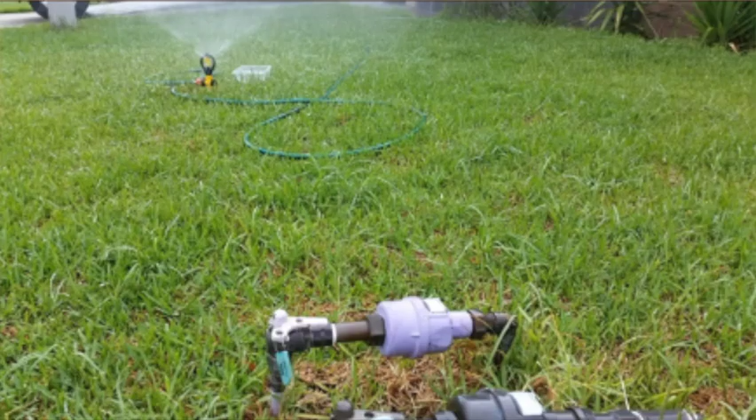Now, the risk of fire spread in urban areas can be prepared for by retaining moisture in the green spaces, which was just covered in parts by various people's comments and Dr. Allen's presentation. You can see here, this is a recycled water meter and a drinking water meter, and someone's liberally irrigating their lawn.

Under fire conditions, it's often towards the end of a drought or in drought, where rainwater tanks are often empty. There's typically water restrictions applying to the drinking water supply. That might mean intermittent, occasional hand watering for houses, but sometimes councils aren't even allowed to irrigate their open space, which limits the ability to keep the green space green.

Now, for the Blue Mountains, this is potentially worse because the upper Blue Mountains water supply is reliant on just those little catchments up at Blackheath and Medlow Bath.

Now, I'm not saying that it's not a relatively secure supply. It's just that as you go into climatic variability, it doesn't have the multiple sources that the main Sydney metropolitan supply has. That became apparent in the 2005-2007 drought period, where there wasn't a huge amount of water left.

So that's a possibility that I know the Blue Mountains Council are cognizant of. Fortunately, at that time, you didn't have the 2019 fire conditions occurring at the same time as that low level of water supply.

Now, firefighting water. Okay, so you've got the preparation, now you've got the firefighting water. You need the water while the fire is happening. That can be obtained by the drinking water supply.

But under duress of emergency, water restrictions are probably going to be thrown out the window. People are just going to get whatever water they can. You're going to have people opening every hydrant trying to fill some lake at Blackheath, but Mark solved that problem.

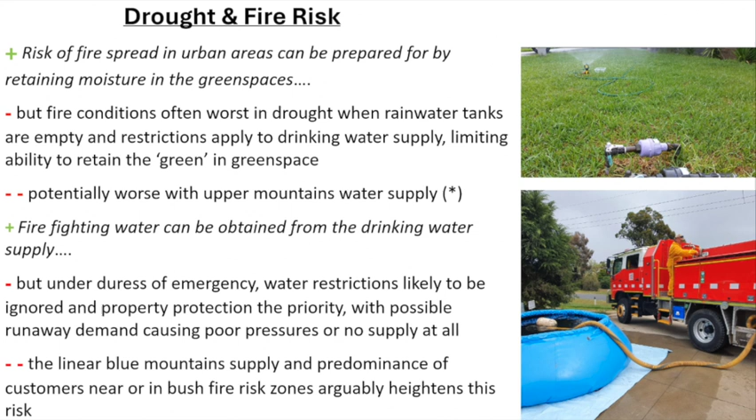Yes, so you've got this issue of can you rely on this water supply? Now, the Blue Mountains water supply is linear. It's not like typical water systems where you can rezone areas if there's a lack of water, bring in water from other reservoirs, opening valves and that.

It's a linear supply. There's really only one pathway for water, and the stakes are really high with this system. Multiple breakdown points, lack of power, not being able to transfer water from one reservoir to the next.

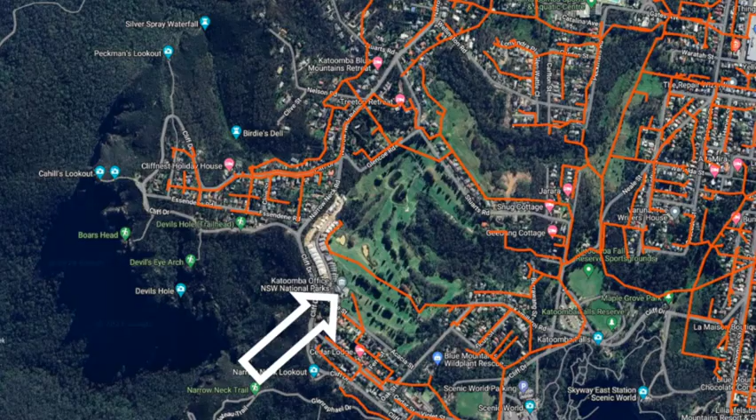Well, we've got wastewater flowing underneath the ground all over the place in the Blue Mountains all the time, even during a drought and even during bushfire conditions, well, at least up until when people are running away down the mountain and they've already prepared their house. So we'll get back to that later, and here we are.

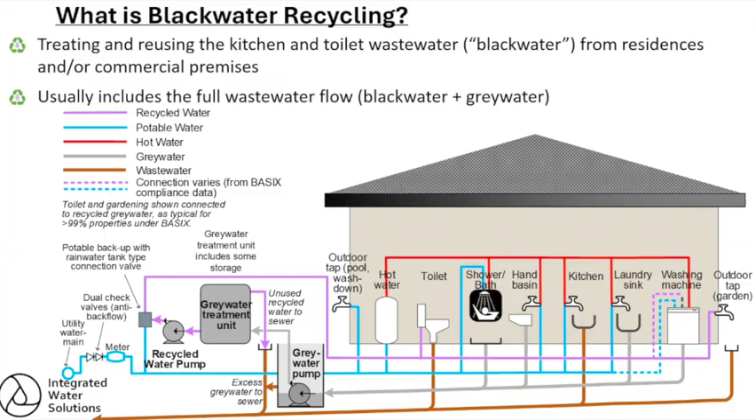Full wastewater flow, black water and grey water. Now, when people say wastewater is like 99 point something or other % water, it is true. I'd say grey water is more like 99.99% or more. Black water, you're talking about 99.75%. But that 0.25% is a real pain to get rid of, because it's got stuff in there that requires multiple processes to remove for the water to be useful for high value purposes such as toilet flushing or garden watering.

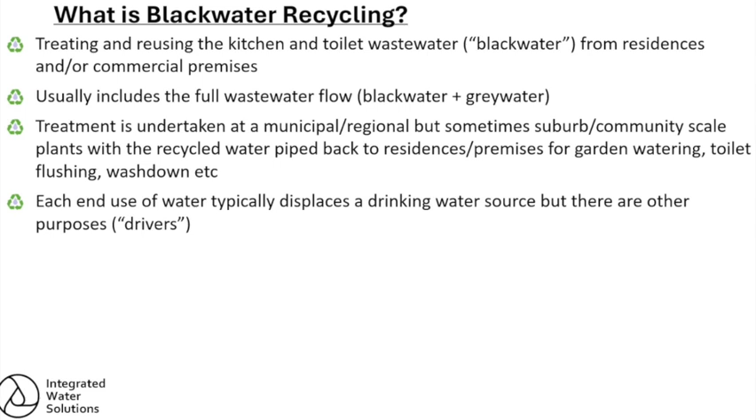Treatment for recycling black water has typically been done at a municipal regional scale, and we'll get onto the reasons why in a sec, but there has been some smaller scale stuff which I'll also touch on, which is my area of interest, and it's where there could be more of a future. Plants with the recycled water usually have it piped back to residences and premises for garden watering, toilet flushing, wash down, and of course, as I mentioned, laundry use.

And as of 2015, certainly in Sydney Water's recycled water areas, the water can be used for veggie patches. Each end use is typically displacing a drinking water source, but there are other drivers, and that's what I'm going to get onto in a moment. So there's different things in that 0.25% of wastewater which we're going to get rid of. The main one's the food, like the food scraps and lots of the stuff, and our human waste.

That food has got energy in it, and we basically rely on settling and biological methods to get rid of that. So letting the wastewater settle, sludge settles out, but there's still all the dirty water above, and we rely on bacteria to remove that, typically by aeration methods. Now there's nutrients in there, especially phosphorus and nitrogen, they're the main nutrients. Phosphorus can be removed by biological methods, but chemical precipitation is usually what's used for phosphorus. And then nitrogen, there's no choice but biology. We have to use a combination of bacteria to do that in a bit of a complicated process.

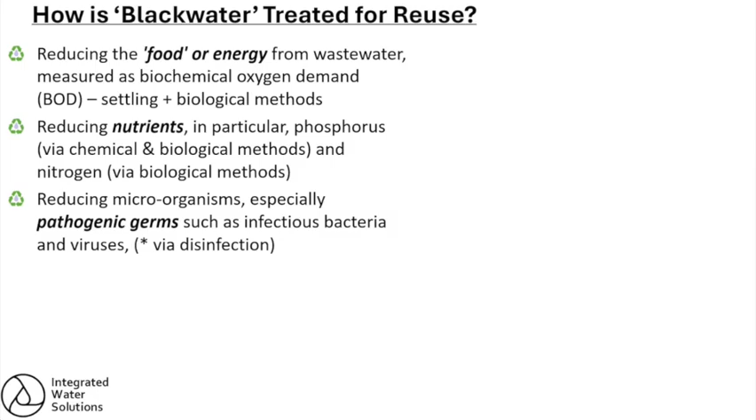With all of this, in the process of trying to remove the food and the particulates from the wastewater, addressing the nutrients, that helps reduce the amount of pathogens in the wastewater. But once you've cleaned it up largely so it looks like drinking water, it looks clear, you still need to disinfect it. So there are human health and environmental risks associated with each use of recycled water. If you're just irrigating a golf course at night, for example, no one's around, maybe you don't need to treat it to the same level as effluent which is treated for garden watering, where there's aerosols and people could be breathing it in.

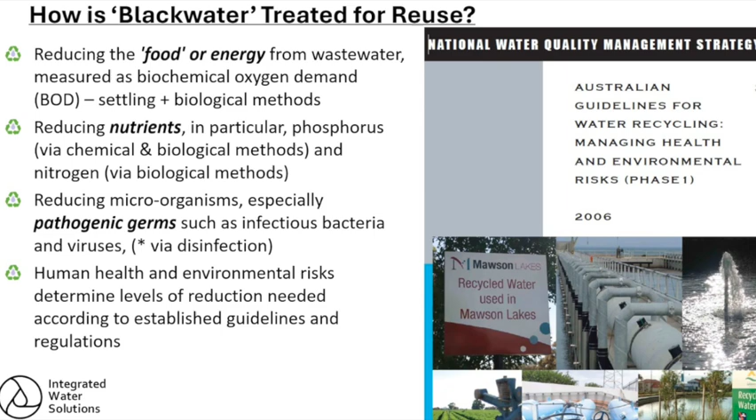So a range of professionals working together at a national level came up with these guidelines in 2006, which have been rolled out as regulations across the states in various forms to give us very good guidance on how to deal with this. It's comprehensive, gives a lot of guidance and a lot of flexibility for particular end uses. Even though it's quite old, it's still very current as far as its applicability.

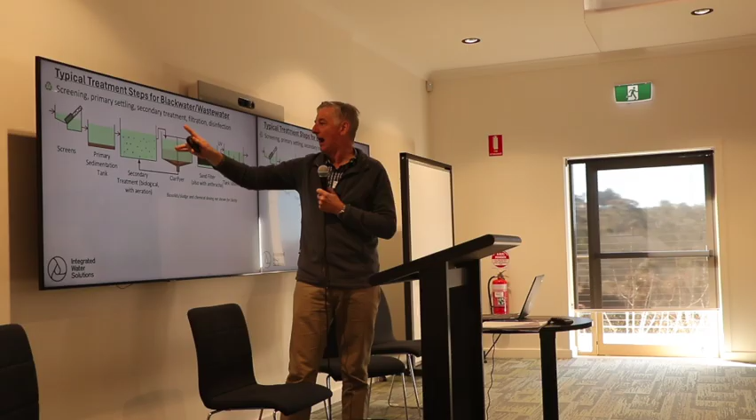People put all sorts of things down the sewer, and that's just reality. Kids put stuff down. So it has to be screened first to remove the gross solids, and then you've got this wastewater that is usually settled out, and then the sludge is taken away to digestion or some other disposal method, and then it needs that secondary aeration to break down that food and start to also eat up the nutrients. These two steps can sometimes be combined, there's whole different permutations and combinations of that. And then that process, when it's bubbling away, looks like a chocolate milkshake, except it's not crunchy.

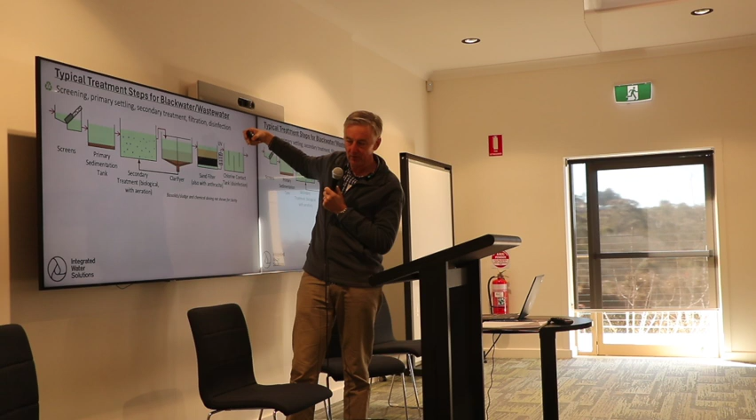So then it's put into a clarifier, and the activated sludge, basically the bacteria and other microorganisms, typically settle out, and then that's put through the sludge processes, and then you've got this clear water, which usually needs to be filtered. Sometimes we're chemically dosing for phosphorus along the way, and then it needs to be disinfected for the higher grades of recycling, such as toilet flushing and garden watering. UV, chlorine contact tank, and off you go.

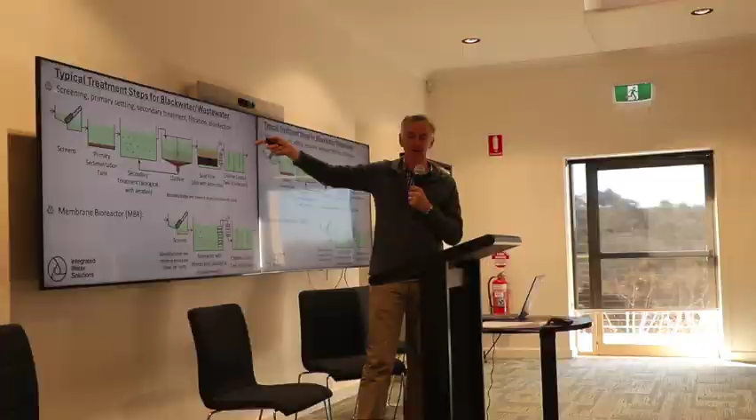This process here is something that's been the main go-to during the 20th century. It was developed in the early 20th century. Many of you would have probably seen the old trickling filters, those big tubs of rocks with the Hills hoist sort of thing rotating around, trickling.

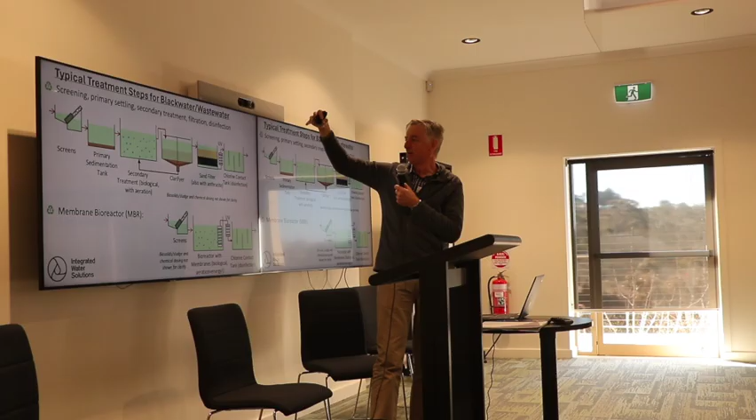That was the earlier attached growth trickling filter method that was developed back in the late 1800s, early 1900s. But this process here, with modern aeration, air blower pumps to pump air in, and pumps and equipment, scraping equipment, we're able to adopt this approach to comprehensively treating wastewater basically all around the world.

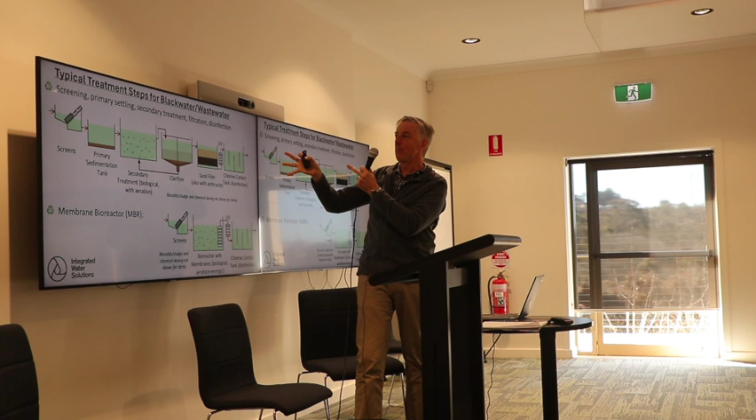But in the last 20, 30 years, newer technologies have enabled a more compact version of this, and you'll hear talk in the small-scale recycled water space of small, medium-scale membrane bioreactors. What you have here is screening, and then basically all these processes happen in this one unit, and the wastewater is then sucked through membranes, and then you've got this clear effluent.

So you've got rid of the food, you've got rid of a lot of the nutrients, and you've got rid of nearly all of the pathogens. Some still may get through, not so much the bacteria, the small viruses. You've got to disinfect those. This has been a really good innovation in making high-grade recycled water possible and affordable at a smaller scale, but it still has its issues.

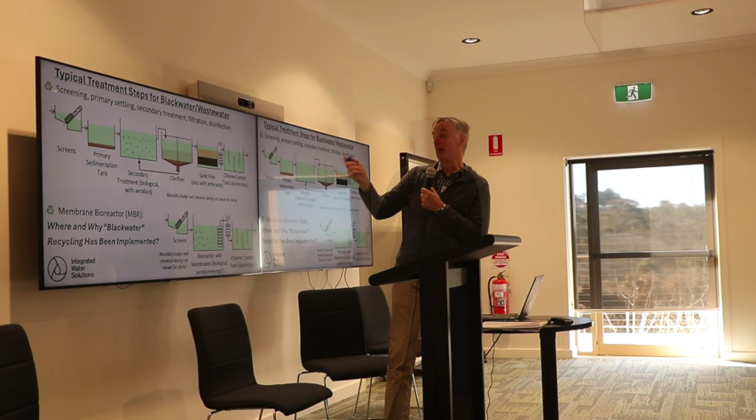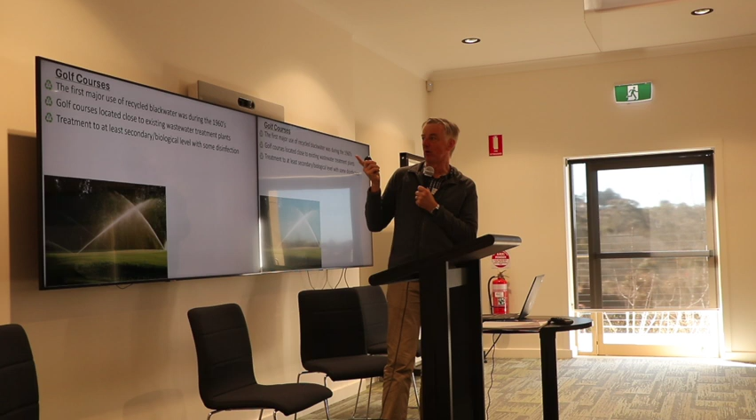So where and why has blackwater recycling been implemented? Okay. First one, golf courses. First major use was back in the 1960s. This is my understanding, certainly the case in New South Wales. You had golf courses located close to existing wastewater treatment plants. The treatment was to at least a secondary biological level, so without going through an actual filter process, with a sufficient bit of disinfection.

And why? The driver? I'm not a golfer, no pun intended. Affordable irrigation water for golf clubs. Now the water utilities were often providing the pipe to connect the plants on a cost recovery basis because they got something out of it. They could put less effluent into the waterways. I think during the 60s, the environmental consciousness was starting to really kick in. 1967 for Sydney, you had these particular golf courses.

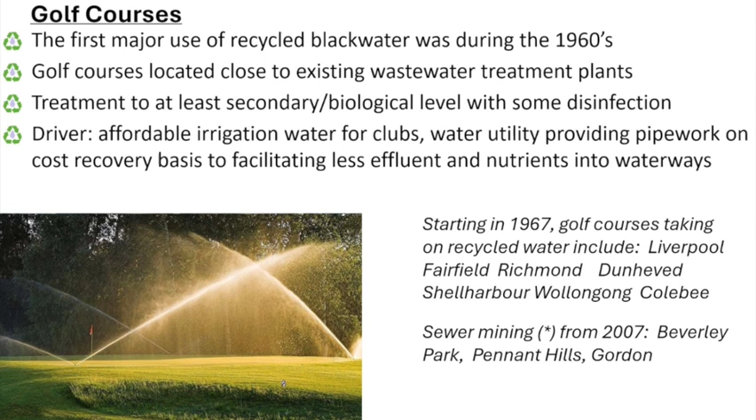Now, another thing that's come on board, I'll introduce this term sewer mining because it relates to the Blue Mountains potential for recycled water. That's where you divert wastewater from the sewer and recycle it for an end use. And because you've taken the wastewater from the sewer and you might treat it to get the recycled water for your particular purpose, you've got the sludge and the solids and that sort of stuff.

You don't have to put it in a digester and process it and then truck it away somewhere like major plants need to have done. It can just be dumped back in the sewer and then that gets handled in the sewer system at the treatment plant.

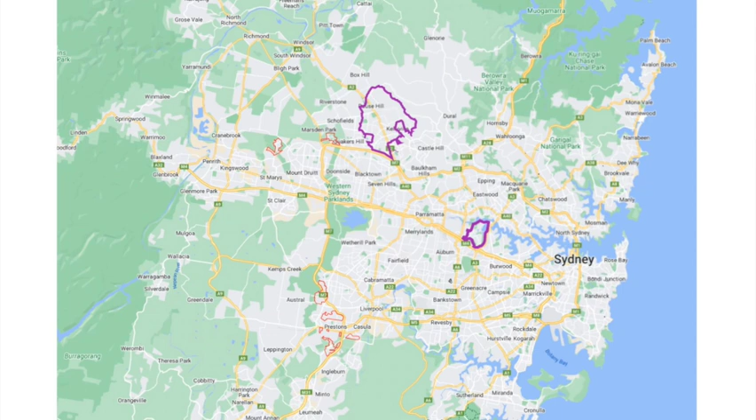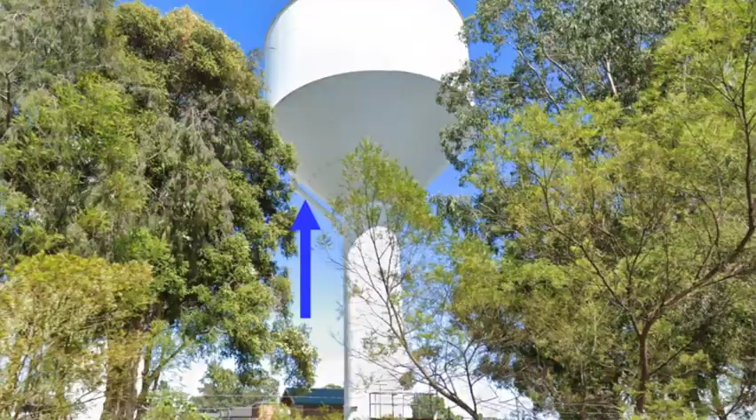And then you've got the chlorine contact tank, the serpentine route, where the chlorine is allowed time to kill off the bugs. In this plant, they built some wetlands to discharge the effluent. This is the water reservoir that the effluent is pumped back up into.

This is at Kellyville, so this is at the southern edge of the catchment, and the water is then reticulated into a second set of pipes. It's called dual reticulation. A couple of other names you'll see in a moment. Now I've got an arrow here. See this pipe here? External pipe that goes all the way out to the top of the reservoir and comes in from the top. What happens at Rouse Hill is that this recycled water is being fed back to the subdivision.

It's about 33,000 houses. It turns out that during really hot weather, they use more recycled water than the wastewater they produce, substantially more. So it has to be topped up from the potable system. It's the sort of thing you wish you didn't have to do, but it happens here, and there's reasons why. I'll just go through here.

Major development in the early 90s. Wastewater from new residential and commercial areas is treated at the new recycling plant, reticulated back by this third pipe, dual reticulation, non-potable network. Lilac is the colour for recycled water pipes. Many of you would know that. It's used for garden watering, toilet flushing, and later on in 2006, 2007, it was permitted to be used for laundry after testing, and then now veggie patches. The excess flows to a tributary of the Cattai Creek. It's the Cattai Creek catchment.

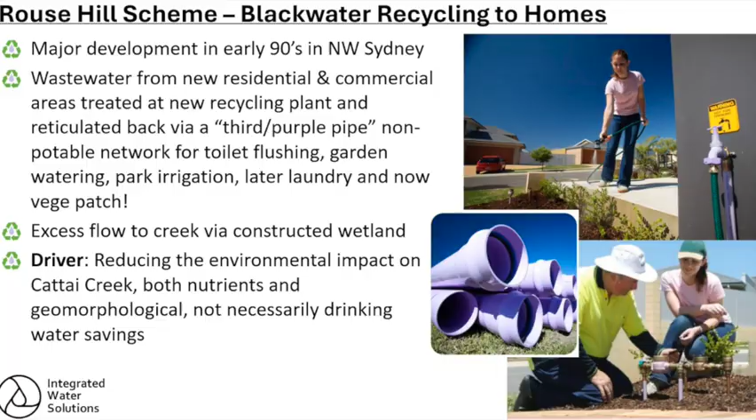Why do they do this scheme? I think this is interesting. It was to reduce the environmental impact on Cattai Creek from nutrients, because we already knew in the 1990s we're getting algal blooms, blue-green algae in the Hawkesbury-Nepean, and they knew that this development was going to be adding more nutrient load on the Hawkesbury-Nepean. But I know this is fact, that they knew the geomorphology was a problem in Cattai Creek. This scheme was going to reuse 2/3 of the wastewater.

Because in hot weather, everyone wants to have recycled water, but on a cold, wintry week in winter, no one wants the recycled water except for toilet flushing, so there is an excess that goes down the creek. So half the time you've got probably maybe half the effluent going down the creek, and then during the colder weather you've got maybe 80-90% of the effluent going down the creek. But just to overall reduce that geomorphological load, because upstream of Rouse Hill, there was a Castle Hill sewage treatment plant, and it had done quite a lot of damage to the creek. So they knew this would be real bad.

So it was for environmental purposes, to get environmental approval for rezoning the whole area to residential, along with a number of water-sensitive urban design initiatives as well in the stormwater space. Sydney Water actually manages the stormwater infrastructure at Rouse Hill, which is quite unique. It was not for water savings. The Upper Shoalhaven Dam was on the drawing board. It wasn't a case of if, it was just a case of when. We'd just be building the Upper Shoalhaven. We're not doing this to save potable water.

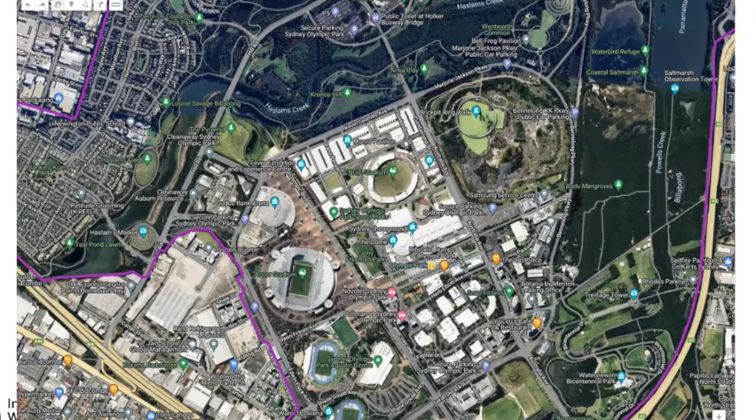So Sydney Olympic Park was developed for the Sydney Year 2000 Games. And what would you label the games as? Yes, Green Games. And one of the many initiatives they did was an integrated water cycle management approach. Well, this is the Easter Show site. There's the main stadium, the Superdome, Qudos Bank Arena, Olympic Village, and the Aquatic Centre and some of the other features there. So this scheme was quite interesting.

They had this massive brick pit, which is largely below sea level, a massive storage site. So stormwater was able to be diverted and stored in this big storage area here. And they withdraw the wastewater from the sewer system, from the main pumping station that serves the site and the Olympic Village. And then there's a treatment plant here where they treat the wastewater to secondary level, that biological process. They don't filter it.

And then it's sent across to a water recycling plant over here that takes the stormwater from the pit and the wastewater, and puts it through ultrafiltration and reverse osmosis, because there's salty water in this brick pit. They need a lot of water for irrigation, but they knew they had to deal with the salt, so they put in reverse osmosis.

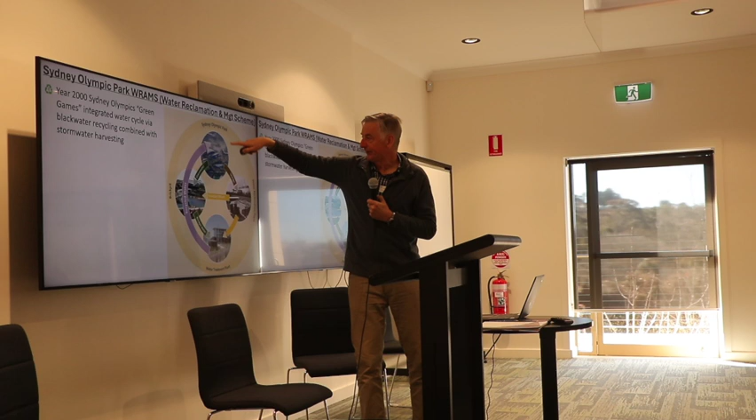It was the Green Games, integrated water cycle, blackwater, stormwater harvesting together. So you've got the site, there's rain falling on the site, it's producing wastewater, the stormwater that's going through stormwater features and into the brick pit.

Sewage is going to this treatment plant for secondary process, and the effluent can either be sent to storage in the brick pit, and they don't really care too much about the algae that grows from the nutrients, because it's going through this UF ultrafiltration reverse osmosis plant that can take out everything. And then the recycled water gets fed back in.

Now there's brine. When you see reverse osmosis desalination, there's a high concentrate stream of salty, briny water. So that gets dumped to the sewer, goes out to Malabar.

Similar to Rouse Hill, they reckon they've halved the water consumption by 50%, half the potable water. They've displaced drinking water supply by 50% by doing this scheme. They use it for firefighting. They're also using it for cooling towers. These are uses that they've been able to get approved later on in the operation of the scheme.

Cooling towers can be an issue with salt, with recycled water, because most recycled water has a lot of salt in it unless you reverse osmosis it. But they've got reverse osmosis, so this effluent can be used for cooling towers.

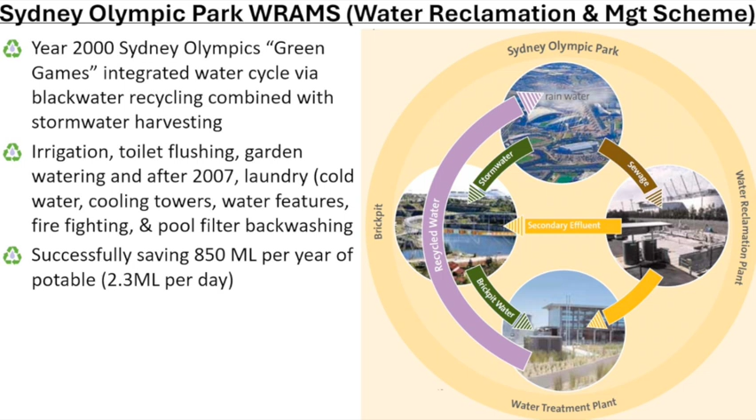And for the pool filter backwashing. So the Aquatic Centre, they actually backwash those filters with recycled water. They don't top up the pool with recycled water, but they do backwash the filters with it. So there you go, 2.3 megalitres a day.

Okay, so the drivers: broader environmental sustainability, water conservation, reducing effluent discharges to waterways, the whole thing when you think of Green Games. They made connection of the cold water, the laundry cold water connection had to be compulsory plumbed to the recycled water scheme there. That was quite an issue.

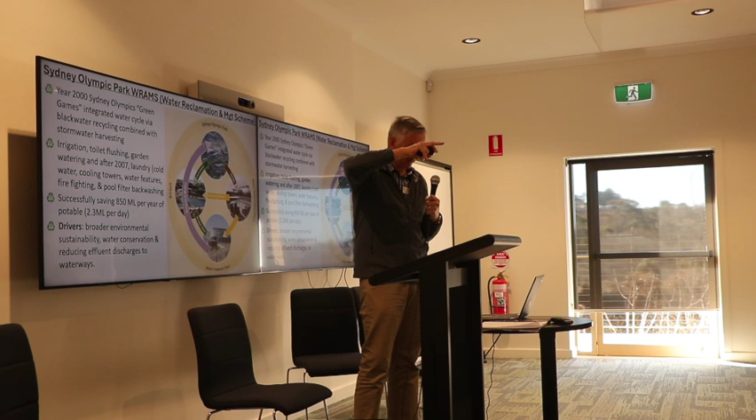We'd have notice of requirements for developments in Sydney Water, and if it was within the Sydney Olympic Park area, they had to have it connected. Outside the boundary, it was a choice.

This is an interesting project in that it's probably the first, it's still maybe the only of its type in the world. Has anyone heard of the Hawkesbury Replacement Flows project? No? Southern Hemisphere's biggest recycled water project. I was directly involved with this project in sizing it and resolving some configuration issues.

The Millennium Drought in 2006, someone thought, well, why don't we release 50 megalitres a day, that's 600 litres a second, from Warragamba Dam all the time, to have enough flow going down the river, so that during drought conditions you don't have salt water coming up to Richmond, and you don't have the bull sharks coming up to Windsor again. I've met people who've seen bull sharks at Windsor.

And you don't have the irrigators accidentally sucking on a high tide, sucking the salt water and pumping it up onto their crops, which happened. So this is an environmental release for human use and for the river health.

So someone thought, well, how about we take the wastewater from Penrith, St Mary's, Quakers Hill, put it through reverse osmosis, make it just as clean as what's being released from Warragamba Dam. No one would know the difference, and we can kill a couple of birds with one stone.

So in essence, you're taking the wastewater from Quakers Hill sewage treatment plant, St Mary's, Penrith, centralised to St Mary's, where it's subjected to ultrafiltration, then reverse osmosis. Ultrafiltration is where you put the wastewater through a really fine process, and then through ultrafine membranes for desalination.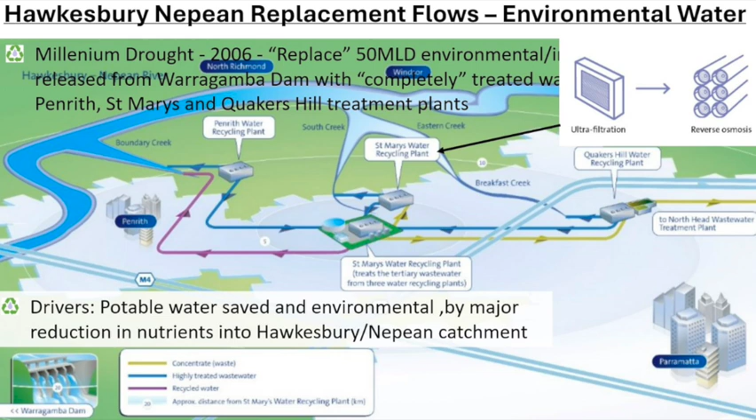So the driver is potable water saved, and there's an environmental driver too, by a major reduction in nutrients in the Hawkesbury and Nepean catchment. If you're interested in the detail, speak to me later because it's fascinating what I and some other people discovered after it was implemented. We didn't quite get the result we expected, but still it's been a successful project.

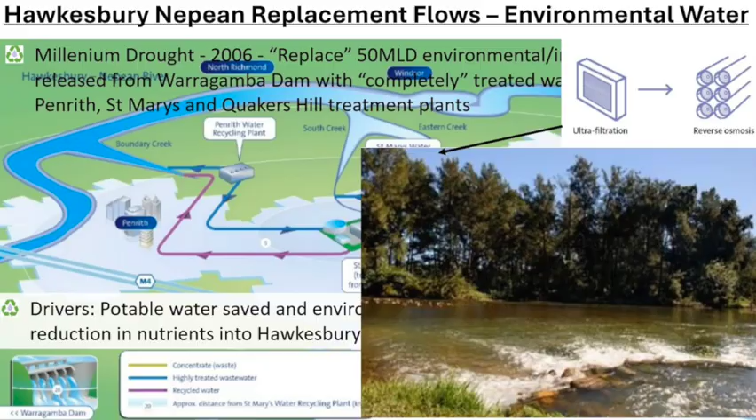There's the outlet, there's where that pristine reverse osmosis water goes and mixes in with the Nepean river water. Has anyone heard that you're not supposed to drink distilled water? It's not good for you. Has anyone heard of that? Well, that's distilled water - it kills bass in 20 minutes.

So they did a fish attraction survey, just some research to find out whether there'd be an issue with fish going up there, and they worked out that they didn't think it was going to be an issue. Platypus were found going up it, and then the platypus gets up to Penrith treatment plant and thinks, I don't think I belong here.

So it has been successful. It does produce clean water, and yes, it has no salt in it, and yes, it did strip the cement lining of that transfer pipeline so there's no cement lining left - but that's another story. It wasn't the only reason why the control valve at the downstream end has had to be replaced.

Now, more Blackwater. Getting back to the homes, getting back to the in-house use. The Hoxton Park scheme, the next big scheme, came up in a big development area south of Liverpool - the Hoxton Park development area. They worked out that they could feed about 14,000 homes with recycled water.

We had the drought well and truly kicked in. BASIX, the water sustainability rules for new development, had kicked in. BASIX means a rainwater tank or recycled water. So they thought, well, let's save drinking water because desalination is way too expensive. Who'd ever do desalination back in 2003, 2004? And that's why the scheme was done.

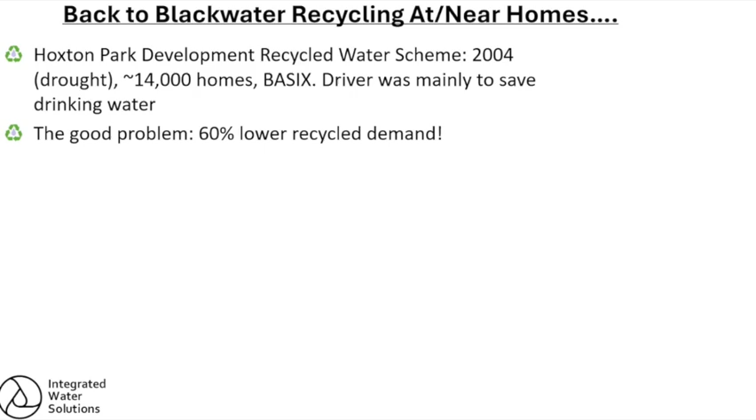This was interesting, this drought. I worked at Sydney Water up until about 2017. I also spent some time working at the Australian Water Association earlier on. Working at Sydney Water during this time and working alongside the people who were involved in managing the drought strategy and the water conservation initiatives that Sydney Water and the government were promulgating.

I've been blown away by how well the community got on board with the water saving bandwagon. The anticipated reduction in drinking water consumption ended up being much greater than what was expected.

So what happened at Hoxton Park: the new development started, they hadn't actually completed the recycled water delivery into the network. They built the network, customers were connected, and they were going to be providing the recycled water a little later on. There was a 60% reduction in recycled water demand because everyone got on board with the water saving.

So at Rouse Hill, two-thirds of the wastewater was getting reused. Here, you're barely getting about 30 or 40% of the wastewater being reused.

And as a consequence, they literally could not switch this system on because the cement lining on the pipes released so much lime, and it took so long for the water to go through the network - or they knew it would take so long - they wouldn't be able to maintain the chlorine residual in the pipe to make the water safe, and it would be too alkaline.

So this scheme went about 12 to 15 years not being used for recycled water, because the cost of servicing this development, so distant from the existing systems, was going to be cost prohibitive.

So he worked for a consultancy, one of the large consultancies, for many years, and he had the experience and the vision, and he was able to get together some investors to get behind this new initiative. So this was the first one, cab off the rank. And there are other companies participating in this space - it's like Rouse Hill, but using an MBR plant and with some extra innovation.

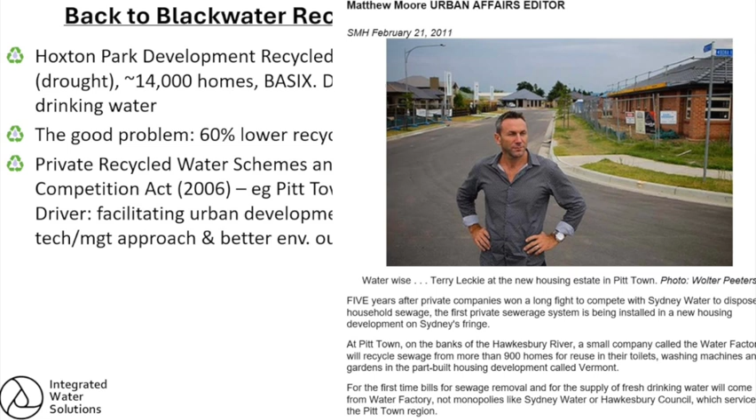And this is from the Sydney Morning Herald. Okay, so it's been a successful development. Hoxton Park - what's happened since then?

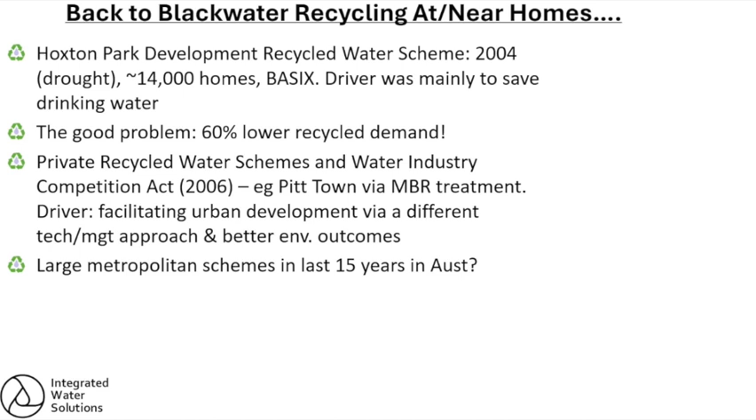Well, in the 18 or 20 years since, there's been a bunch of other smaller schemes that were done at the same time, only about 1,000 or 2,000 houses. There have been no new ones initiated in 20 years in Sydney, but it's happened elsewhere.

So let's get onto this. Okay, what are the emerging drivers? Circular water - blackwater reuse could play a role, whereas in Sydney it sort of hasn't.

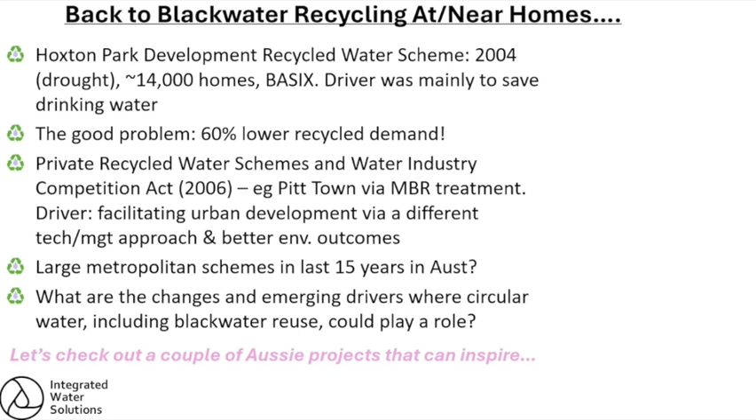This is the stuff that motivates me to try to take the baton further.

Currumbin Eco Village - has anyone heard of it? It's near residential areas, and they could have connected to the existing sewage system, but this development got more awards than any other I've heard of, including a lot of international awards. It was a true eco-village in every sense.

They have to build their houses with mainly recycled materials and low energy features. You see solar panels, both hot water and photovoltaics, no fences, and kangaroos grazing around. They went fully off-grid - 147 homes on about 100 hectares.

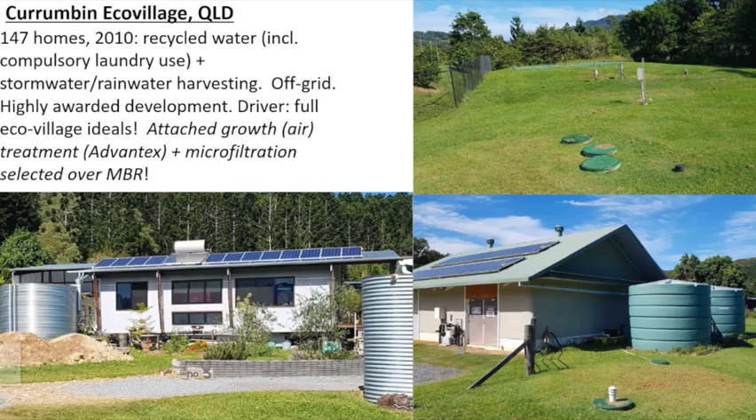There's their wastewater treatment - the biological part of the plant is below ground. These are the membranes, because they have to treat the biological process. It requires microfiltration membranes to make it clean enough for toilet flushing, garden watering, and compulsory connection to the laundry. In this building there's chemical dosing and membranes, and on the other side is a community centre - when I visited there were kids playing there. They've also got a major storage area which is covered over so algae doesn't grow.

The interesting thing is that they chose an attached growth process, where the wastewater is sprayed on drapes hanging in the air, rather than MBR. This showed that maybe MBR is not the silver bullet.

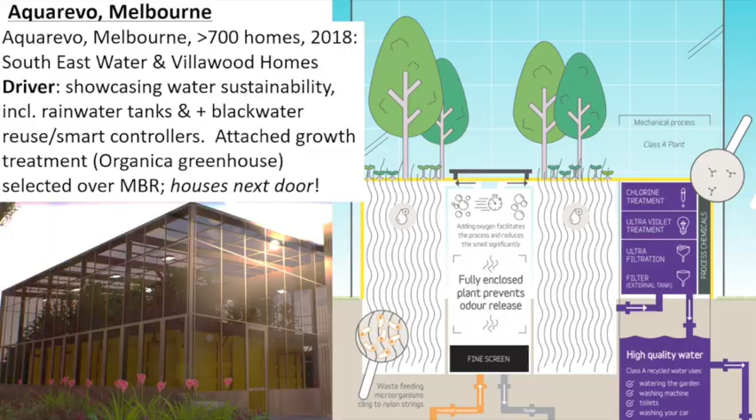Another one is Aquarevo, run by South East Water, one of the three Melbourne utilities that operate as retail water entities in Melbourne. There's also a headworks entity called Melbourne Water that provides bulk water to them. They wanted to showcase some innovative stuff, so they partnered with a forward-thinking developer to demonstrate water sustainability, water management, and integrated water cycle management.

They actually proactively control their rainwater tanks - if a storm's coming, they'll automatically dump water out of people's tanks ahead of time, so they can collect that peak and attenuate the storm flow. So they've got recycled water, rainwater tanks, and the treatment process they've chosen is Organica - once again, a process chosen over MBR.

It's a greenhouse using native water-friendly plants - basically a native aquaponic treatment plant where the roots go into tanks where they're aerated. There are also additional nylon strands put in there so the biological activity focuses on attaching to items. It's more resilient - you're not pumping lots of air to mix it all up to make the bugs work. Instead it's attaching to a substrate, which is the trend in virtually all the new innovations in wastewater treatment over the last 20 years.

So this plant is actually under construction.

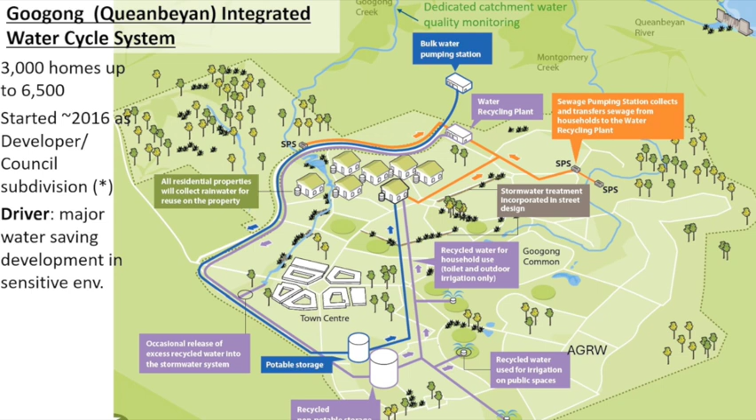It's been successful. I don't know whose idea this was, it may have even been the developers, but it's volunteering to have a dedicated online water quality measuring station downstream of the development, just so they can be held personally responsible for the outcomes of the development.

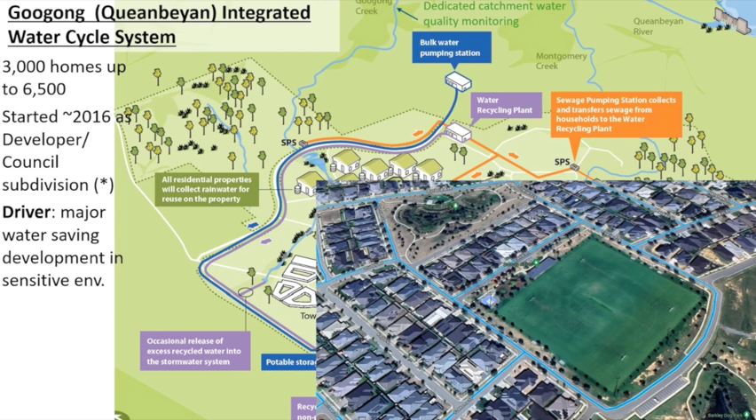This was taken when it's dry, this must have been the summer shot, very dry around here. You can see the watering of the water sensitive urban design feature. The playing field is nice and lush, worth going out to rather than staying on a screen at home.

The treatment plant still looks pretty industrial. It's quite a major plant, not a cheap one, but once the cost is spread across a large number of properties, it is likely to be affordable.

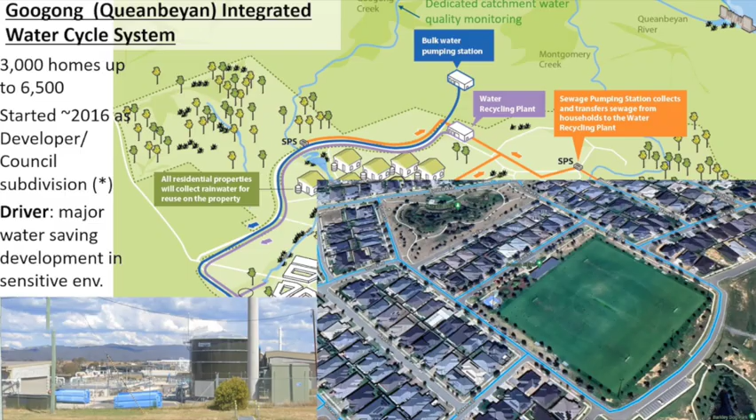The drivers are different. You might have noticed there's various reasons why water's being recycled. There's complexity. It is quite complex to produce a high grade of recycled water to get rid of all the food, the nutrients, the pathogens. At a small scale, MBR's done a pretty good job.

Googong's a successful example. Because of that complexity, it's been hard to really replicate these smaller recycle schemes, and currently, certainly for Sydney, there's a trend towards centralised systems. But I question that, because there are variables that haven't necessarily been considered.

Circular economy ideas are starting to kick in. There probably hasn't been a decent exploration of circular economy thinking applied to a decentralised approach.

One thing I'm interested in with the small scale systems I'm involved in designing and planning is using electric trucks to tanker away the solids to centralised resource recovery, because you can do it, and no one's going to bat an eyelid at a nice quiet truck drifting down the street versus a noisy diesel powered one.

The economic imperative. Third pipe developments are happening in Sydney still, not by Sydney Water, but where the development wants to proceed and build a system, like Pitt-Town, with Sydney Science Park being the latest one. I've been engaged to assist with that, resolving some of the technical issues on this scheme.

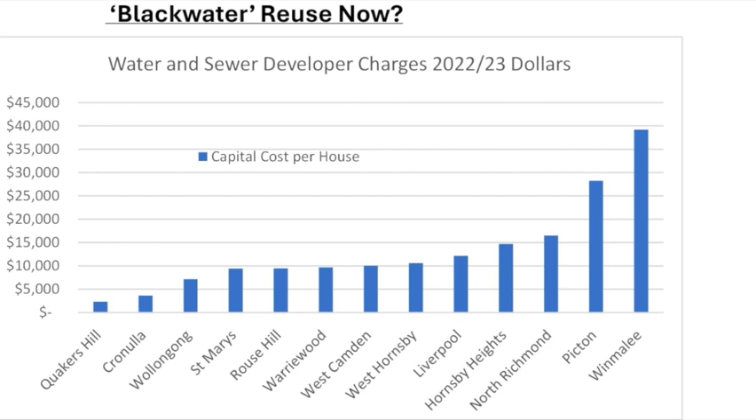Another driver is fire protection and developer charges. Where are the expensive places to develop in Sydney? Do any of those look local? This is the charge they calculated back about 15, 16 years ago, and it's just been increased by CPI. They haven't yet calculated what it really should be. I know Picton, they've recalculated that charge, that's gone up to 50,000. I don't know what Winmalee is going to be, but it depends on growth expectations in the catchment. The economic aspects, we must not let go of that.

There's been a lot of innovation in recycled water, a lot of government grants and schemes that were done when there was a lot of push toward green buildings, during the 2000s drought and subsequently. A lot of things were tried. Some of them worked, some of them didn't. That was excellent, but a lot of them were uneconomic, especially stormwater recycling based on capturing storms only.

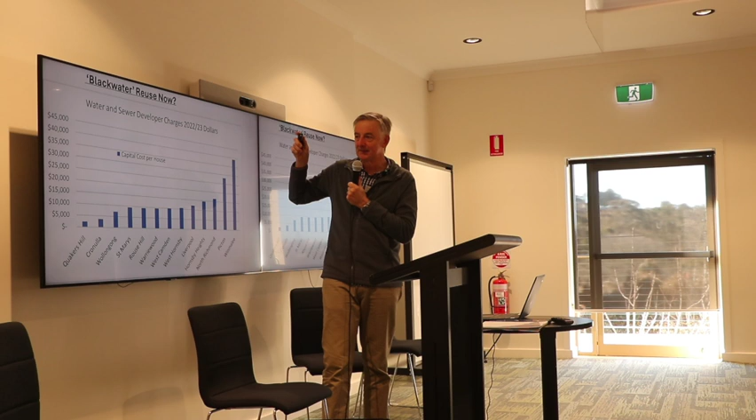For the future, we want to make sure the environmental side is also explored economically, because if you've got all the planets aligned, we can get to a much lighter touch on the planet. Firstly, we've got to make sure the engineering economics is sorted.

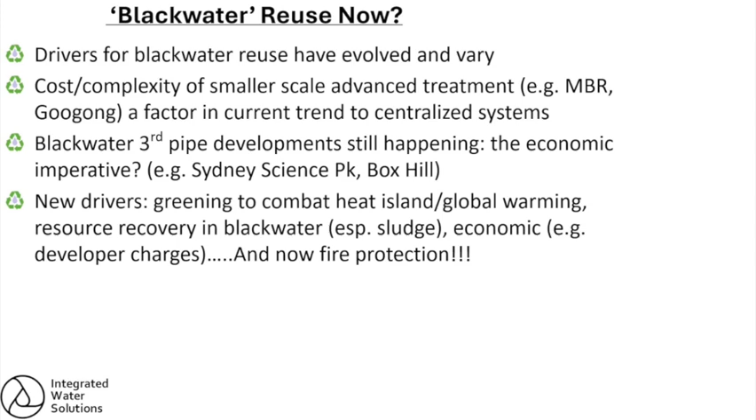We saw that green field before at Googong, the nice playing field. Not allowed at Rouse Hill, because Sydney Water is legally not allowed to sell recycled water to Baulkham Hills Council for the 20 cents a kilolitre it costs them for electricity and extra chlorine. It costs them 20 cents, but they have to sell it at $1.80, 90% of the potable price, because them's the rules. Sydney Water's whole pricing model is based on that.

It requires the minister to give a directive to do the smart thing. So what happens? The playing fields tend to be dry in summer, and the effluent goes in the river with nutrients. I raised this, it was one of the things we tried to push while I was at Sydney Water. There were so many regulatory and policy issues that had to be dealt with.

That was just another one of those issues, and it was only intermittent. If there's a resurgence in looking at these sorts of things, it might get significant enough to be on the radar. But the thing is Rouse Hill is only one small area, and there's only a handful of playing fields this applies to. You never know.

With better economics, being able to get wastewater treated close to where it's used, without massive infrastructure taking it a long way to a treatment plant and piping it all the way back with all that upfront cost, the default is to get the stuff off-peak onto the playing field. On a stinking hot day, you don't have to water the playing field when everyone else is watering their gardens and needs enough pressure.

I'm collaborating with some other companies active in this space, where we all need to progress this, and there are good ideas that can get traction. It's just a matter of getting the right pathway.

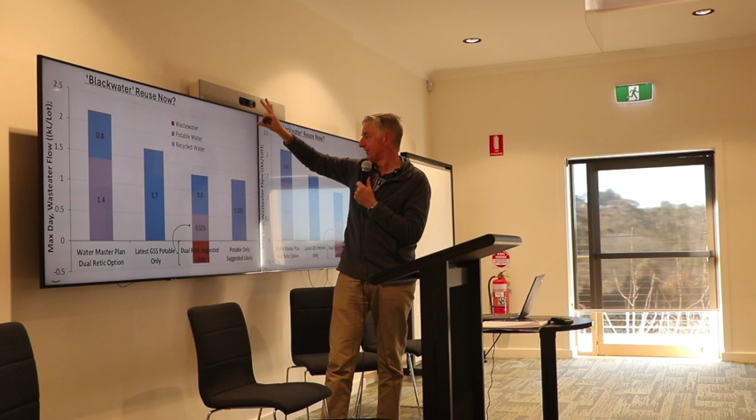I'm particularly passionate about moving to attached growth technologies, which offer higher reliability and lower energy, small-scale wastewater treatment to enable higher grade recycled water close to where it needs to be used, using technologies developed in the last 10 to 15 years. Some ideas have not yet been used mainstream, they've only been trialled. The houses, the subdivision you saw before, where you had Rouse Hill and the new subdivisions where the houses are bigger and there's not much backyard.

It turns out nowadays at places like Hoxton Park, new subdivisions, you don't need to top up the recycled water system with drinking water, because it turns out that the likely peak demand, this is the highest demand on the hottest day, for recycled water can be basically fully met from the wastewater produced from that subdivision.

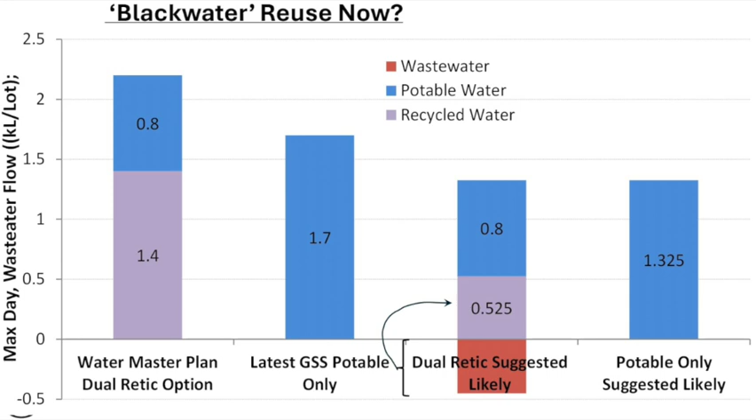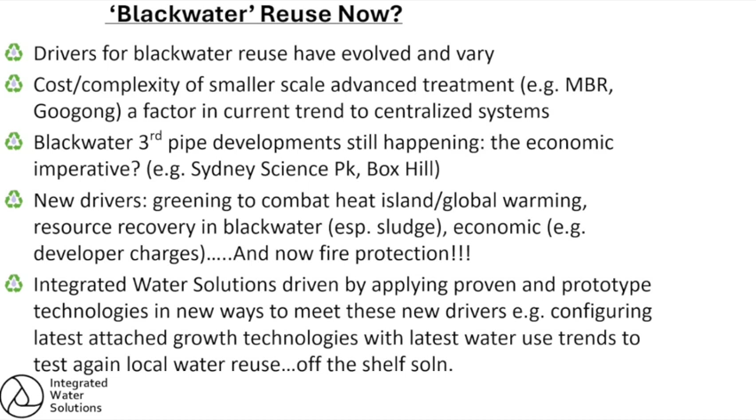Once you go from that down to that, then it affects the whole configuration and costing of doing the urban water thing in new subdivisions. But setting aside water-sensitive urban design, which is probably even more important. Drivers for blackwater reuse have evolved, and they vary, interestingly. Small-scale systems, they're a factor in current trends to centralised systems.

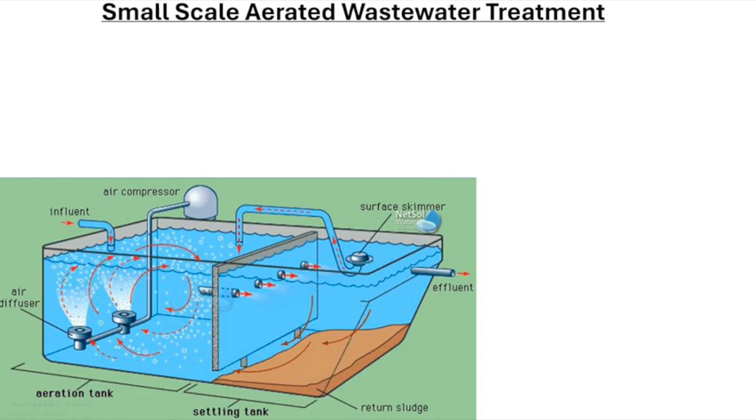Small-scale, if you're going to do small-scale wastewater treatment, what do you do? Many people would know that you've got acre blocks now. You've got an acreage block, and you've got to build a new house. Usually the council says, "I want an aerated wastewater treatment system," and that usually just involves aerating the wastewater once it comes out of the septic tank, and then the sludge gets settled and pumped back into the septic tank. Difficult. It's doable. It's been sort of successful, but they're never really working all that well.

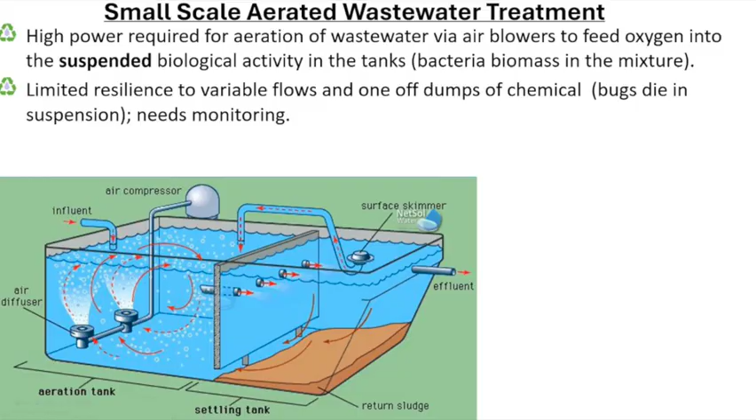It uses a lot of power. You've got air blowers, which are much less reliable than modern pumps. You've got suspended biological activity. Some of them do put in plastic lattices now for bugs to grow on, which helps. And not much resilience to variable flows. And people putting Drano down. It needs more monitoring. There's a config for a project that I've just done some planning work on.

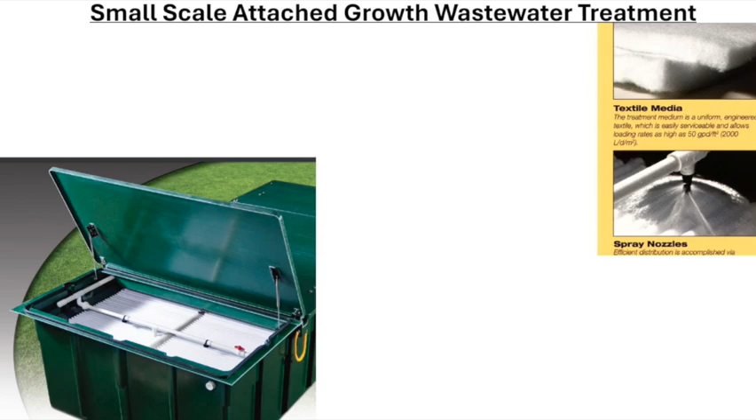Surprisingly expensive compared to the alternative, which is attached growth systems where you've got media and you spray the effluent onto the media, uses a lot less power. You've got a biomass growing on, in this case, a felt system. The bugs grow on the felt, the effluent sort of dribbles through the felt, gets filtered out. You have natural air contact, can handle if there's no power for a long time, bugs don't die, and don't have to visit as often.

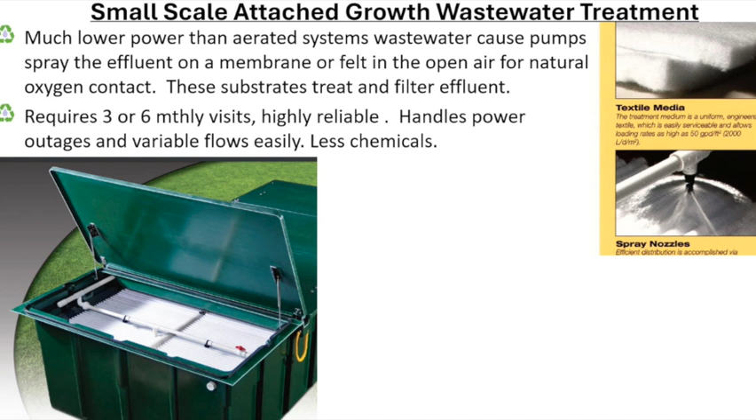The project that I've been briefed to undertake is to look into the feasibility of sewer mining and maybe adapting some of the water features here to provide a secure source of water, and also, before the fires come, to provide that recycled water that can be put into the landscape here. Yeah, so irrigate, maintain pond levels.

There's challenges. It's hard to reduce nutrients in wastewater at a small scale. It can sort of be done, it's expensive. So nutrients is an issue. We don't want to have nutrient water flowing into the waterways in any substantial sense. Maybe some recirculating wetlands can work. Sydney Water's done some trial wetlands at Picton Sewage Treatment Plant that gave some good results.

So it's a challenge. But the opportunities, you don't need this in winter. So you don't need to recycle this stuff in winter. And you've got advance warning of having to have it up and ready and working. It's a very different reuse perspective that I haven't heard of being faced before. So a bit of new thinking here. There's stuff that I'm not aware of that you all might have in your minds. So it'd be good to get your feedback in the next session.

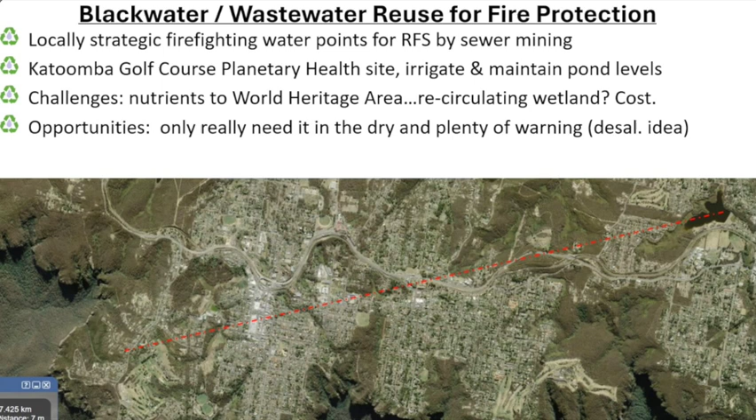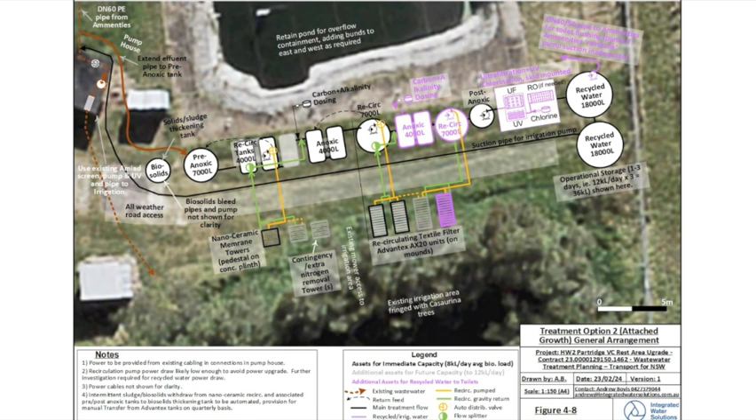There's desalination that can be done here. You can desalinate wastewater so that you don't have the nutrients going into the waterways. That's also an option. I know of a particular application where there's some people who would really like to have a desalination plant in winter that don't need it in summer. You need it in summer, but not in winter. There's an idea. This is one of the projects I'm currently working on, and that's full circular. That's recycling water again and again and again for toilet flushing.

I'll leave it there. I'm sorry I went too long, but